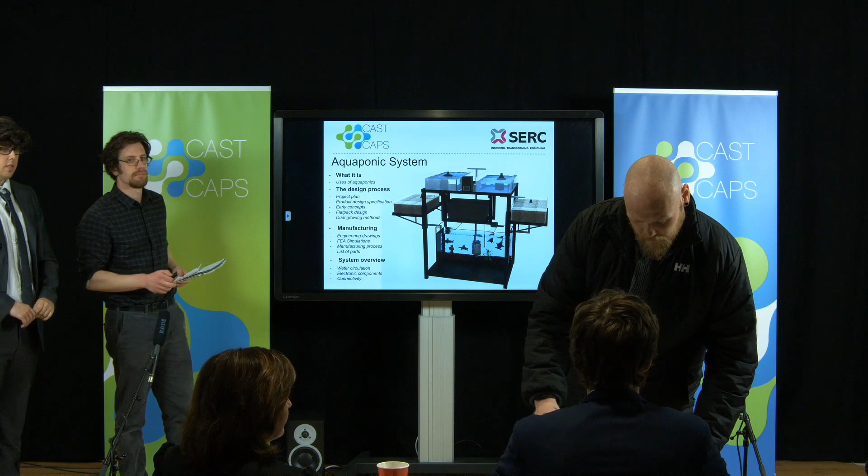So this is our aquaponic system. Within the presentation we'll be going through the different aspects of our aquaponic system - the design process, how we planned it out, the specification we made, and the various other parts of the system, including the manufacturing and the electronic sides. With this type of system there's a lot of different aspects, so the key part of our project was to research everything and make sure we fully understood what was involved.

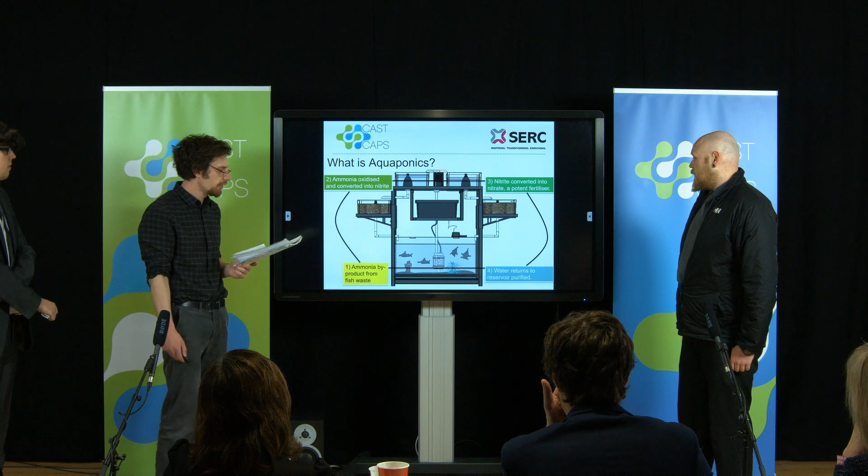First, what is aquaponics? If you're not familiar with it, the simplest way of putting it is that it's where aquaculture meets horticulture - you're using fish life as a basis instead of soil for growing plants. The first stage involves fish waste, and a byproduct of fish waste is ammonia. The water, including the waste product, is fed up through this central pipe, and when it comes into contact with the root of the plant, it's oxidized and converted into nitrite, which is basically a basis for nitrate, which fertilizes the plants. When it's absorbed by the root, any toxic element from the fish waste is cleared, and it's recirculated into the system as purified water, and the cycle continues.

So where can aquaponics be used? Basically, we want to introduce a system into the domesticated market - there's no system like this outside of commercial scale. Our idea is to introduce something into schools for education purposes, to teach kids about engineering and various other aspects of life cycles. The idea is that this incorporates all elements of STEM, so if implemented in an environment like schools, kids could be taught different aspects of this.

There's electronics in this system, and the basis of the electronics is that there's software and programming involved. There's also the learning element of using fish waste to create plants, which is another aspect kids can be taught at an early stage - teaching them about sustainability and how to keep the environment safe. This can be used in a wide variety of areas, like urban areas where there's not a lot of sun, so it can be put in warehouses so crops can be grown healthily and steadily, and families who may not have time to go out and get vegetables can quickly grow fruit and veg that's healthy.

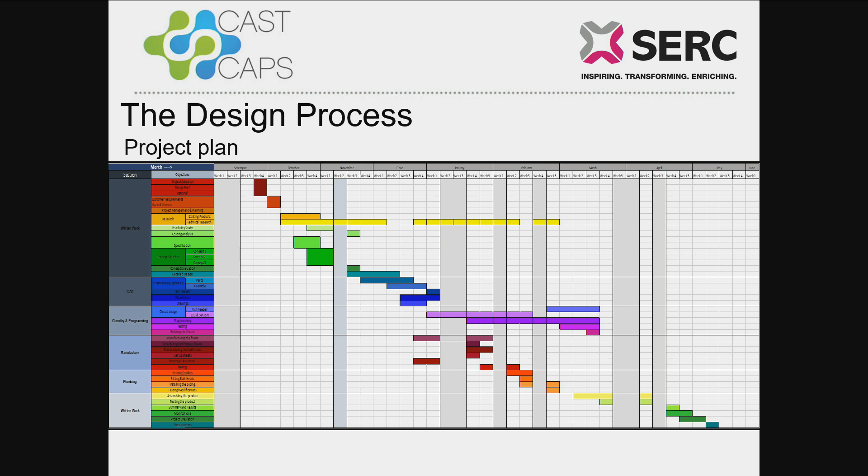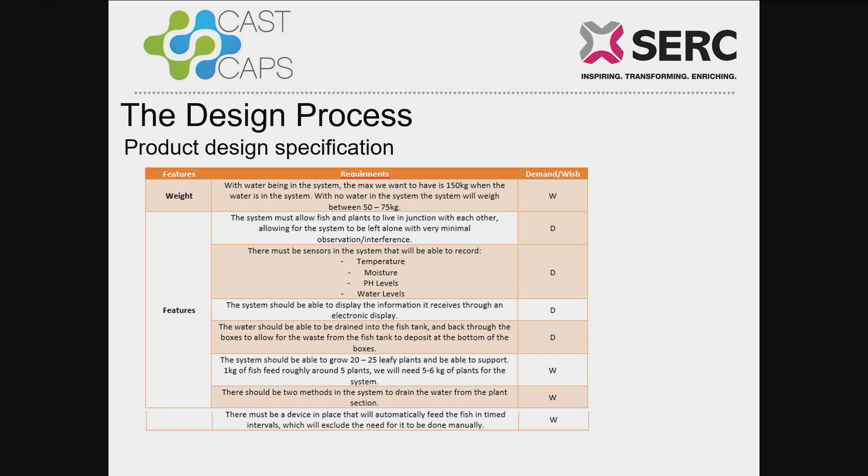This is our PDS, which we used to take the stakeholders' claims in order to design the system. You can see various aspects like the weight. They wanted certain weights and stuff within the actual system itself, and these were known as wishes and demands. So we built our system around that.

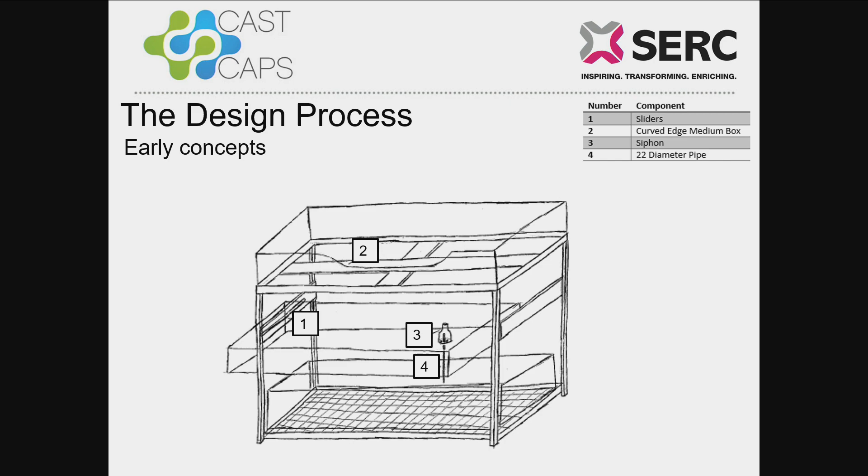So the idea was that this could be implemented in a smaller environment where people could just go in, do their job, put it away, and come back to see that the plants grew healthily. In this concept here, we basically combined the other two and incorporated them into this one system.

But quite early in the design process, something we decided to build our project around was the idea of making it flat pack. The motivation for this was that if it was to be sold in mass produced units, you wouldn't be putting the fully assembled one in stock due to its space intensity. So we actually managed to find a way to condense it down to quite an efficiently sized package.

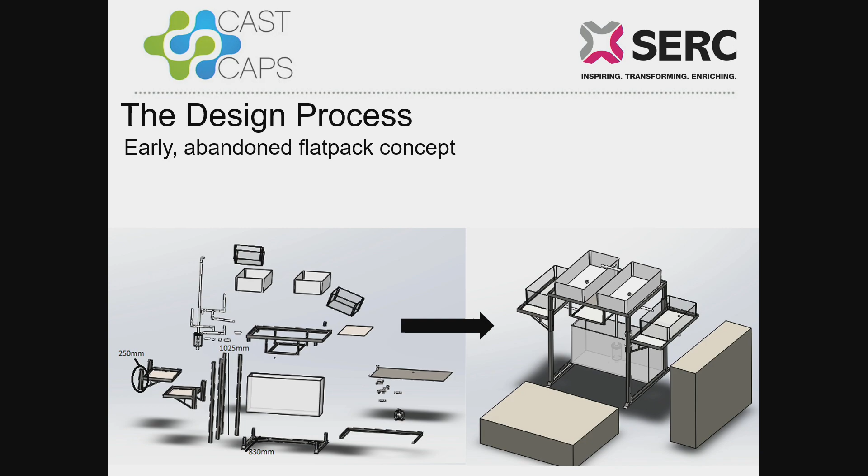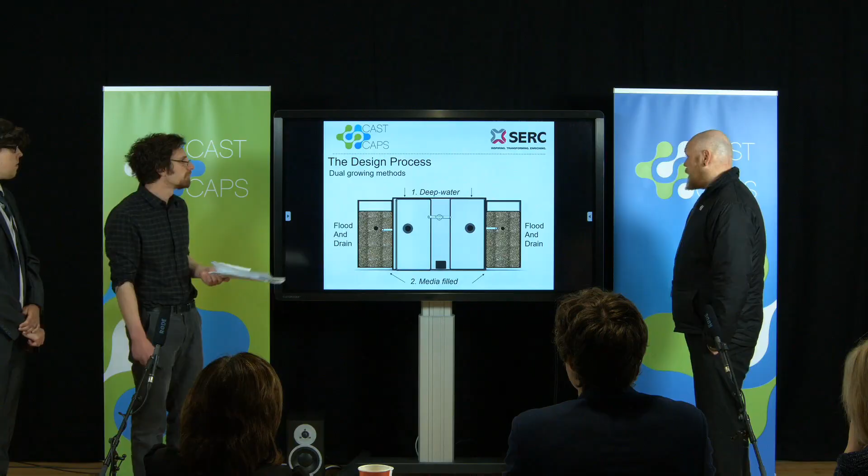Basically, our system works with having two beds at the top here, which will drain off through a wee inlet here, which allows the water being pumped up from the bottom tier into these two beds. Then there'll be siphons in each one of these beds here, which will drain into these side beds, and then that drains back to the main reservoir through solenoids.

With this type of system, there's a lot of water in it, so this means that over time there's a lot of stress from the weight of the water. So to help us design our final design, we used software to simulate the stresses that would be involved with this type of system.

The issue we had was that this software didn't have the required material properties that we wanted. The material we used was mild steel, with a yield strength of around 200 meganewtons. The yield strength for the material we had to use was 350, but the idea was to give us an idea of how the system would work with the water.

From the stress analysis, the biggest point of stress is in the corners at 100 meganewtons. With a 200 meganewtons yield strength, this is quite good because the factor of safety will be around 2. For a system that's quite static and wouldn't be moving around a lot, especially for a prototype, this is quite good, so not a lot of stress will be implemented on it.

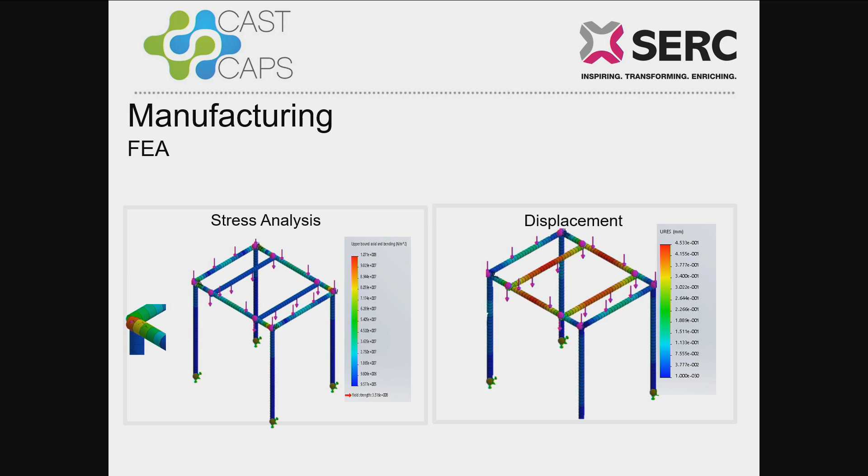Let's speak about some of the manufacturing process too. The system was basically made from box section and angle iron, and the reason I went for that was because it was cheap. Obviously it's going to have the element of rusting, but we had the idea of galvanizing it to give it a bit of a protective layer, then painting it. You can see here from the bottom tier how the top tier is going to slide in, giving it that element of assembly. These here are just basically sitting on the outside, and that's what's holding it up in place.

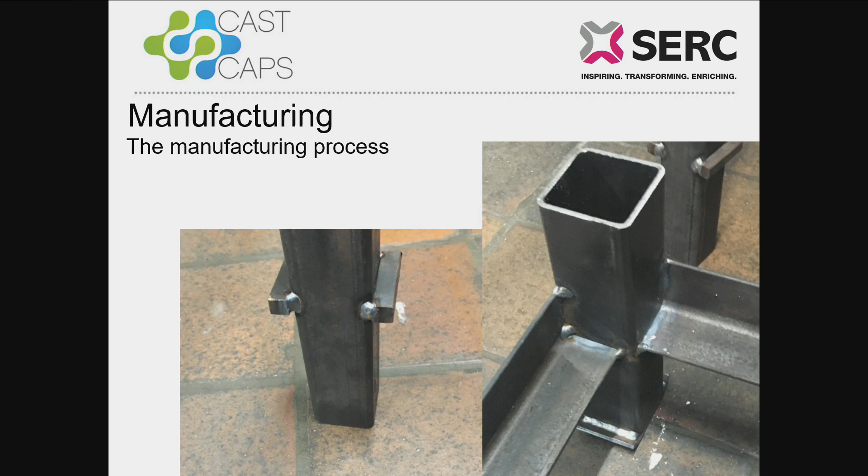To cut the cost, if this were to be mass produced, it could be bought from suppliers, which would cut the cost quite significantly. Other components like the electronics or the plumbing could also be mass bought from suppliers, so all the costs would be brought down significantly. But because it was a one-off project, the costs we had were quite ideal. We were able to source different components from the college itself and different components from outside the college.

This is a wee system overview of water circulation, which shows you the siphons in the top beds and also in the lower beds here. The issue we had was because bell siphons usually need to be 300 mil in depth, but due to the limitation we had with the boxes' depth, we had to think of a new way of creating enough air to get inside. So we made a wider diameter that tapers up towards the top, and the air being compressed works well.

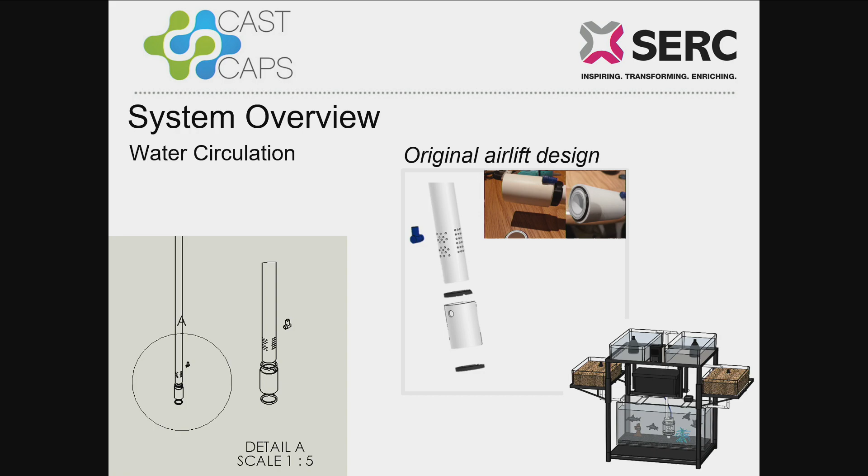The idea being that air is just pumped in, and when it is in a compressed area, it has nowhere to go but up, and that will eject the water with it. This original design was okay in a lot of ways, but the flow rate, the amount of water it was pumping upward every hour, was somewhere in the region of 140 litres an hour, which would not be sufficient for circulating the water through the system enough without the supply stagnating.

So I moved on to a second one, which took on the form of an inverted siphon, also inside a chamber which would put an added element of pressure. As you can see from the bottom here, this is a check valve where the water can come in one way but can't come out the other. So when this fills up, as it would when submerged, it gets to a point where that shuts off, and there's nowhere for the water to go but upwards as it ejects through this siphon here and outward. This yielded much better results of about 240 litres an hour, on top of the 140 of the previous one. That was a big improvement, and it would be adequate for circulating the water in the system enough to keep it fresh and not stagnate.

I have two videos here if it can be clicked at all. Can I click in here? No? Okay, that's okay, alright.

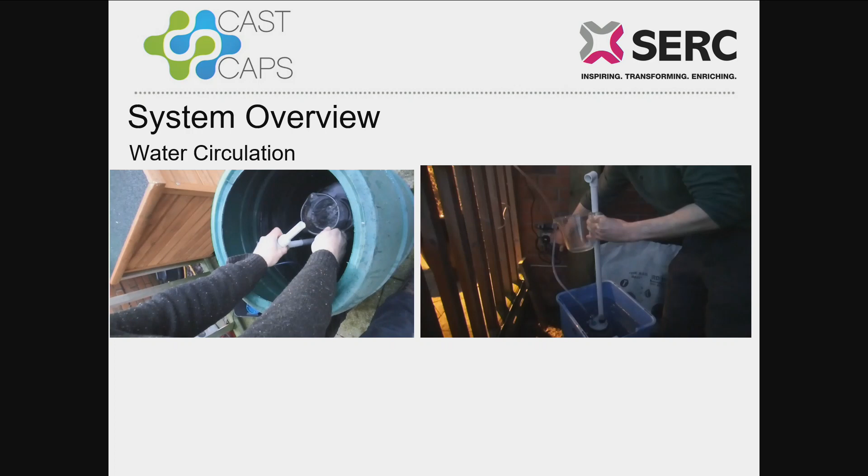So that's the first one there. You can see it's quite stilted in the output. There's nothing really wrong with this in itself, but if you look at how low it is in the water for it to get enough necessary submergence for enough pressure to get the water out, there's absolutely no way that would have gone high enough to supply the top beds.

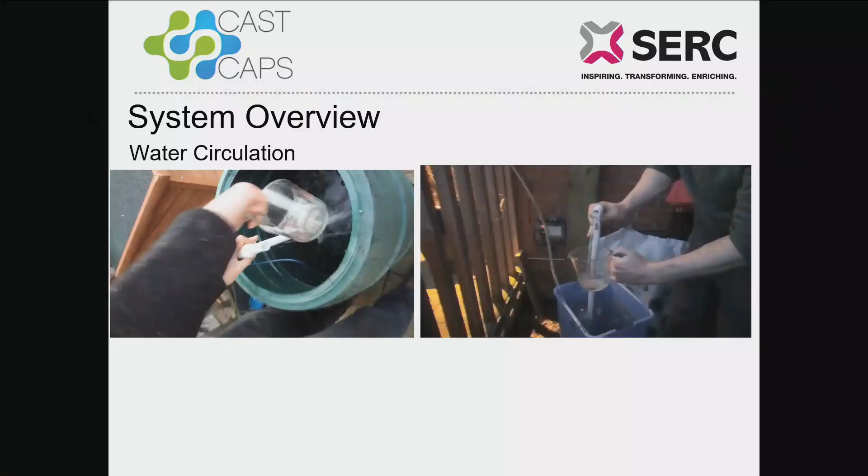And this is the improved version on the right hand side here, which was submerged in a much shallower base, and it still produced quite a significant amount more, and also with consistent flow as well, which would be a bit less obnoxious on the ear.

So the idea of this system was that over time different elements could be observed, and with that idea we decided to implement various sensors, which we'll talk about later in the slide. But for the information to be recorded, we needed a certain area specified in our design that would display this.

So what we done was we created a control panel where we could use various LED screens where the information could be displayed. The idea we had was that we could use a touchscreen LED where you could type in information. Especially with the fish, depending on what fish you have, they eat up different amounts of food. Over time you could observe this behavior and control the amount of food going into the system, so that the waste produced will help make sure the efficiency of the plants is to the max. So the idea was that the whole system could be observed and information recorded in this touchscreen, and that you could go back in time and find out the point of max efficiency with this particular system.

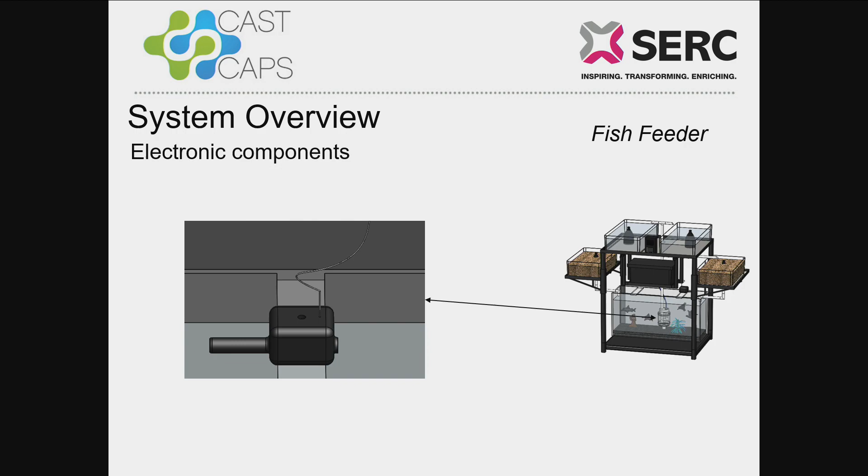So this is also the wee fish feeder here, which is located just above the fish tank here, which is obviously just feeding the fish.

Among the sensors that this system uses are a moisture sensor, which, as you can see, would be sitting in the smaller bed containing the grow media, likely clay pellets or something such, and also a pH meter and temperature and humidity meter. The thing about these is that they don't necessarily automate the process itself, but when connected, can serve as a good early warning system for some sort of malfunction. For instance, if this was generating a low reading, it would most likely indicate that water is not being pumped up and circulated into the system. So it sort of indirectly serves as an alarm system for the pump.

And likewise, the pH will indicate the pH within the water, because you want to keep it quite neutral. If you don't keep it neutral, and it was too acidic or whatever, it could kill the plant and have an ongoing effect within the system. For fish generally, the likes of tilapia, which would be very common in aquaponic systems, they thrive in a pH of around 6.5 to 8.5, which is in the neutral to slightly alkaline range.

Anything above, when you're starting to get into the region of around 10, that would really suggest a build-up of ammonia in the water. That just serves as a suggestion that something's not quite circulating, or the plants aren't quite filtering at the rate you'd expect them to be.

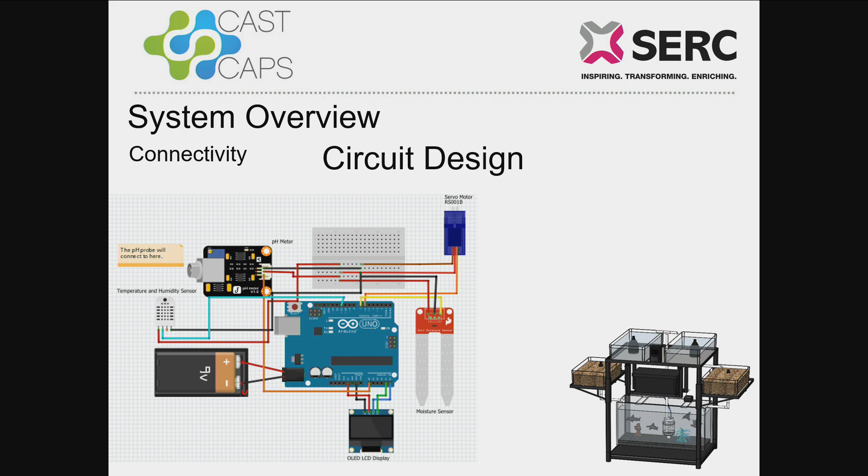So this is just a brief overview of the circuit design. It's a small circuit. The idea is that the electronic box, pointed out in the drawings, will hold all the electronics, keeping them safe from the water. The Arduino here is essentially the brain of the electronics. This is where the program is written, and information is read from the sensors to the Arduino, which then writes it to the LED screens.

Another concept we had was using a Bluetooth device, so you could pair your phone up to the system and read a live feed from the sensors. The problem with this, especially with the LED screen we used, is there aren't a lot of resources for it, and with the number of different components in the system, a lot of time would need to be dedicated to this. But through testing and eventual improvement of the program, we could implement it.

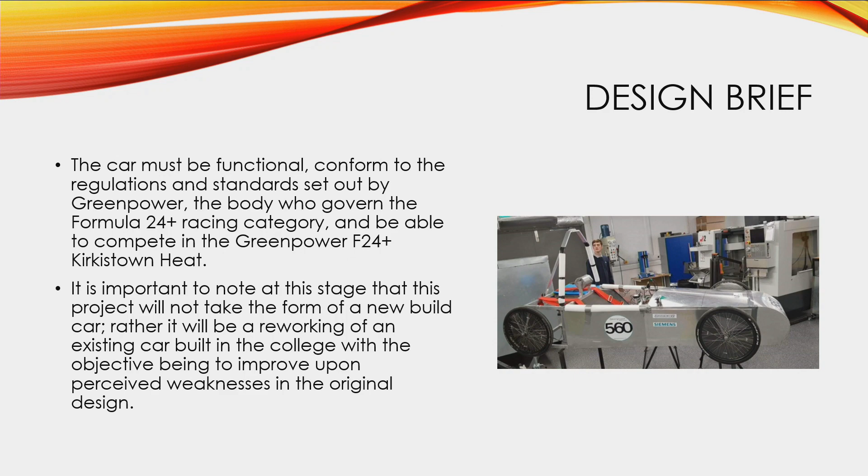So because this is going to be entered in the Greenpower Racing Series, it has to conform to the technical regulations and standards set out by Greenpower. It's important to note here that this car is not a new build - as I've mentioned, it is a rework of the existing car.

So with this being a group project, we had to indulge in a bit of project role delegation. We split the project up between ourselves into two main elements. I would be focusing on the steering - strengthening the steering setup, as well as employing proper Ackerman steering geometry to ensure a good turning motion and proper handling of the car - whilst Simon would be looking at the drivetrain and at moving away from the belt system which we'd employed last year.

The belt system, while it worked, required the belt to be very tight to stay on its sprockets, which we felt was causing inefficiencies in the drive system. Hence we wanted to look at other potential solutions.

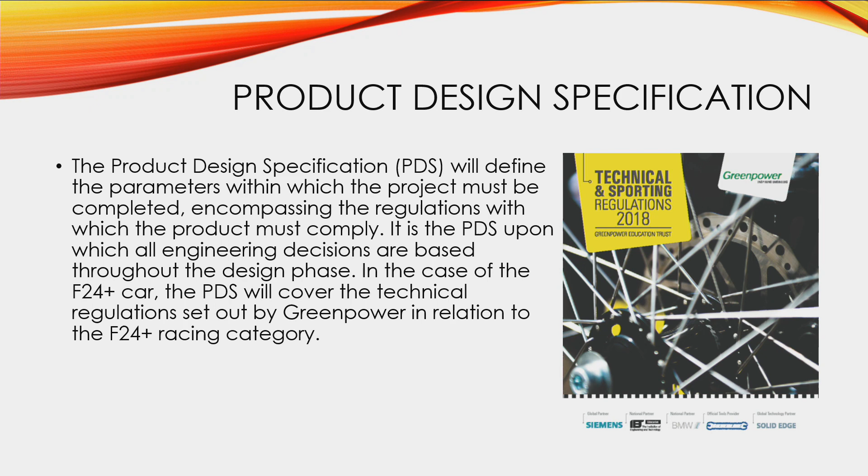An early part of the project is to produce a product design specification, or PDS. In our case this is based broadly on the technical and sporting regulations for the 2018 season as published by Greenpower, and we've got a handout showing our PDS if you care to look at that.

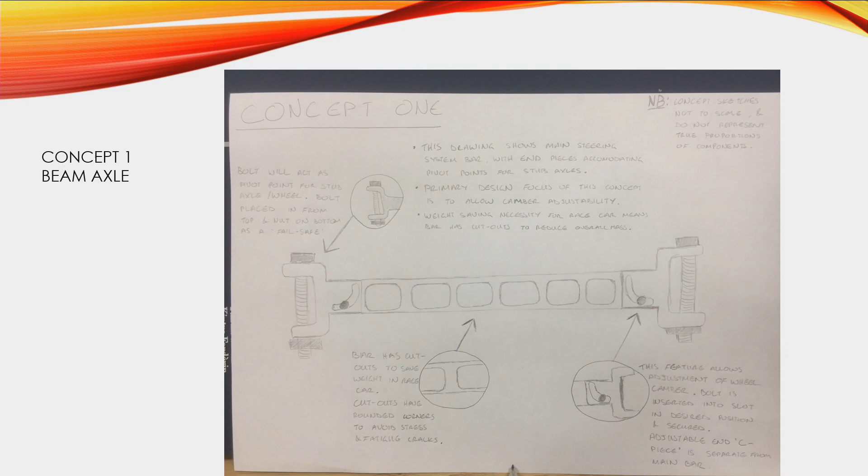This was the first concept, and this employed a beam axle similarly to what was used in the car last year, but the theory behind this was that we would employ adjustable camber angle, which would allow for fine-tuning of the handling of the car. However, we ultimately decided not to proceed with this concept, as the degree of adjustability would be too crude, and I felt it was a potential area of weakness, as we had experienced issues with the strength of the front axle in the previous season.

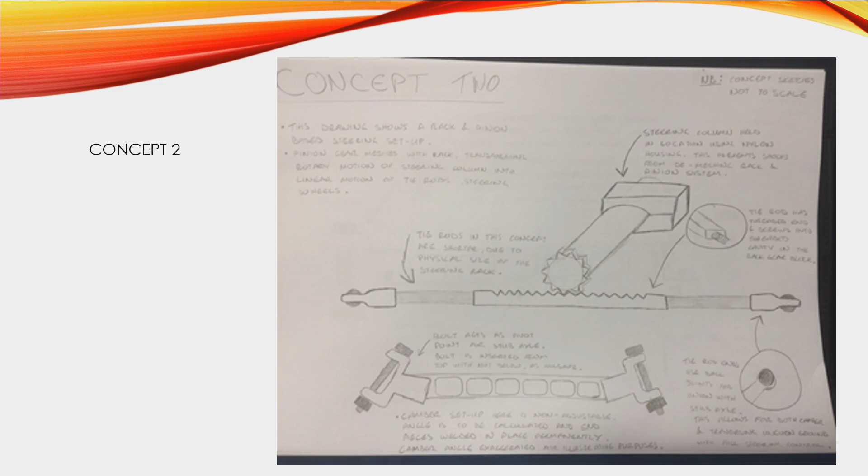This is just a development of concept 1, showing how the track rods would interface with the hubs and the steering arms. In concept 2, we looked at moving from the basic track rods and steering arms setup to something employing a rack and pinion, such as you'd see in a lot of road cars. However, ultimately we decided not to move forward with this one either, on the basis that it was adding really unnecessary levels of complexity for what the car is.

I'll just hand you to Simon now to talk a little bit about his drive system concepts.

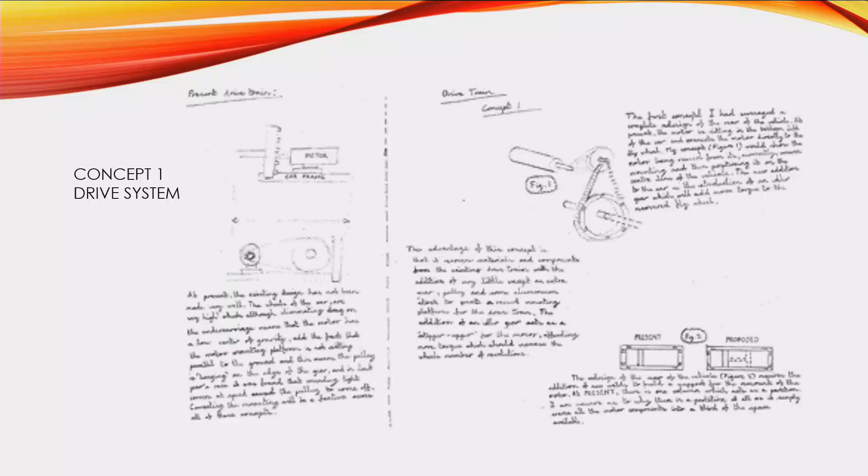Thank you very much. Moving on to the first example of my drivetrain. In the first example, I planned to continue with the pulley belt originally, with the introduction of an idler gear, which would act as a stepper-upper for the motor, so that rather than running from a rather low gear ratio to a very high one, it would go through a middle stage, allowing it to gradually increase and hopefully produce a better result in terms of speed, efficiency and performance.

But when it came to production time, we realised that construction of such would require the motor to be moved closer to the driver's head, which presented some major issues when it came to the health and safety of the driver. Since, as my friend James illustrated, we were working on a refurbishment, we were limited to the space we were working in, so we had to make use of the space, and as such there was no room for an idler gear.

Which brings us on to concept 2. In concept 2, I planned to bring in a differential, which would allow both wheels to run off the same axle and revolve at different speeds.

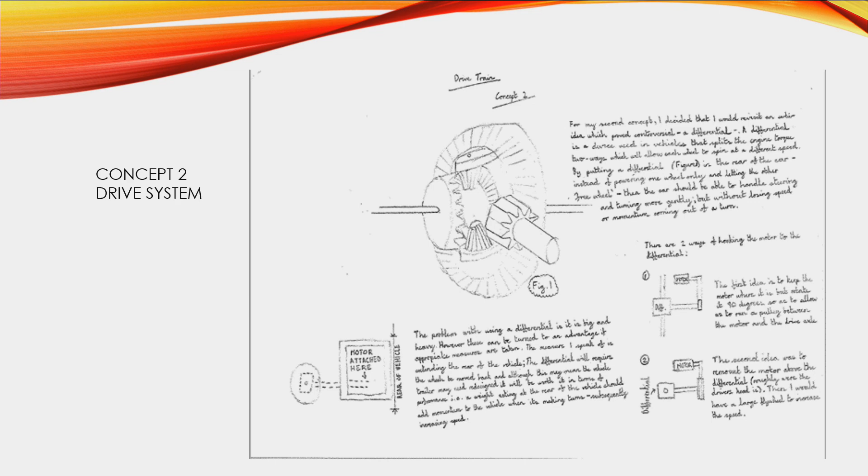This seemed like a good idea initially, but moving further forward with the idea, we realised that a differential is very heavy, as it's only really used in larger scale vehicles and would have to be recovered from such a place. They would also require a lot of time because you'd have to get the gear ratios right for the smaller wheels, since the cart isn't built to the size that most differentials would be. And once again, there were time and space constraints regarding the size, weight and placement of it.

Which brings us to our final concept, where I plan to use a recovered bike derailleur gear shifter. The purpose of this being a lead on from concept 1.

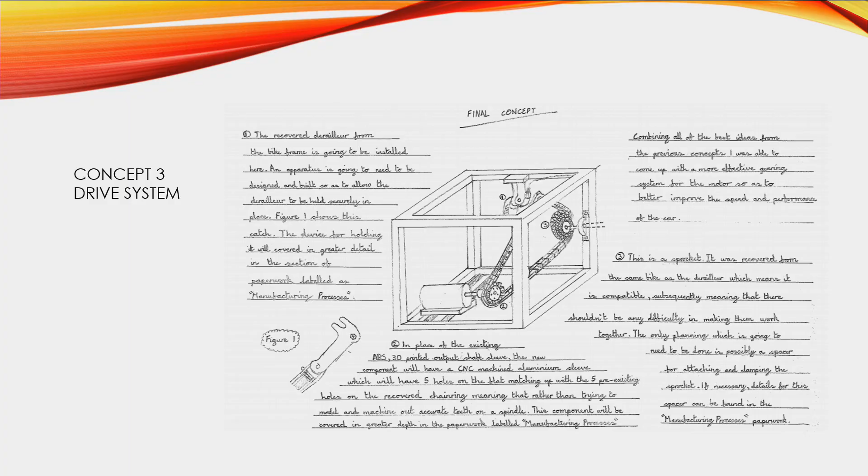In concept 1, I planned to have a stepper upper. Concept 3 took this idea further with various levels of gear change. So we brought in a gear sprocket recovered from an old bike, a recovered derailleur, and our own components, which there are drawings available for you to see. This would allow the driver, using a gear shifter in the main cabin, to adjust his gears as needed to get the speed and torque required on the track on the day. This is our final synthesis, and you'll see we decided on final concept 3.

Now we'll look at some SolidWorks. Once we decided what steering system we were going ahead with, it was time to start drawing things up. These are renderings of the front axle setup as it now exists in the car. You can see the middle section, the beam axle, was actually recovered from the car as it was run last season, because that had been made to overcome a failure in testing, and it functioned flawlessly on the day, so there were no strength issues there. If it ain't broke, don't fix it.

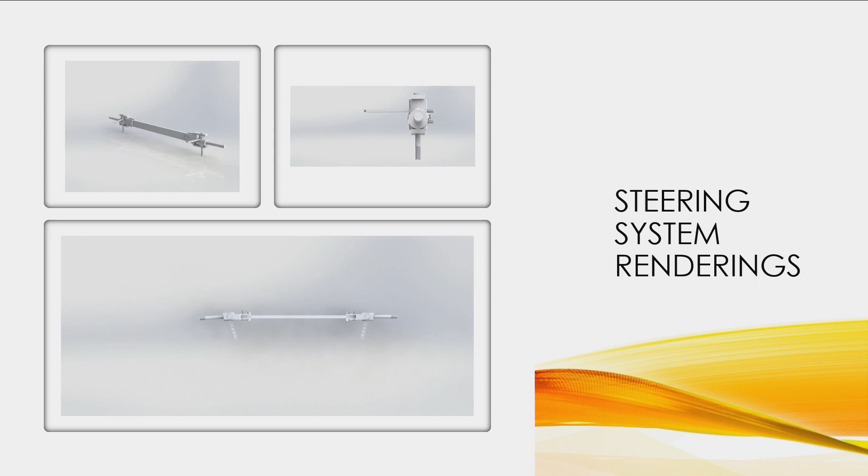The hub carriers last year had been welded on, but I felt that having welds of possibly unknown quality and strength was an area of weakness that could fail. So we decided to move to bolt-on, bolt-off hubs, which also makes the car easier to maintain if there was to be a failure. As you can see from the inclination in the drawings, there's a 3-degree camber angle set up, which allows the steering to self-center properly due to the inclination of the kingpin. Also, when the car's going at speed, you increase the contact patch of the tyre with the road, allowing for more neutral and balanced handling.

Here we've got some stress analysis done in SolidWorks. This is one of the hubs. You can see a 3D printed version that was produced before we committed anything to metal, and the stress analysis shows this is mild steel. We've got a yield strength of 200 newtons per millimetre squared, and from the multipliers on the scale, the worst stress that can occur is about 45, using a load of 50 kilograms.

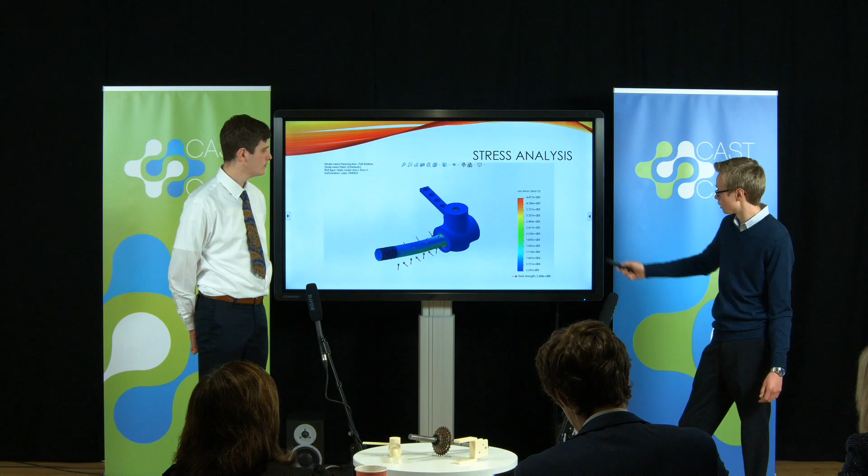We calculated that because the cart weighs about 120 kilograms, and the average male weighs about 80, giving a total weight of 200 kilograms split between the 4 corners. You arrive at your 50 there, which is 500 newtons of load, and you can see from the colours in the graphic and the numbers that you're not going to get anywhere near the load that's going to trouble the materials. While we have some deflection shown on the diagram, that's a worst case scenario, and in reality there's no deflection on the part at all.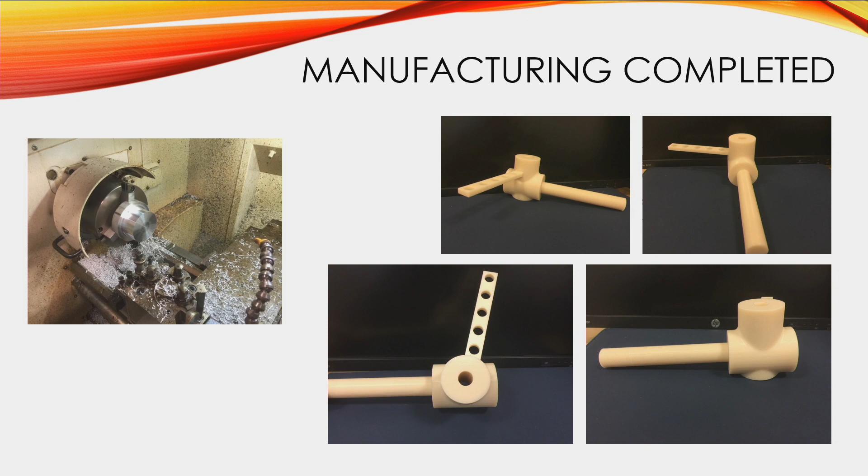As I was saying, we put things through the 3D printer just to see that they would fit in the hub carriers, that the design was okay to go ahead with before we fabricated anything, and that's what's on the table there. Just got a quick video here, I hope this plays okay.

This was the part, just a part of the drivetrain being produced. I thought that would be interesting to have a little video.

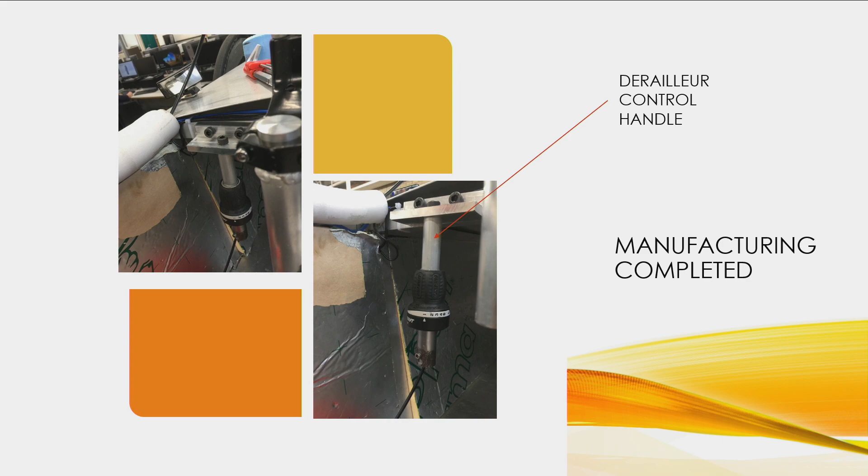Simon will tell you a bit about this slide. As I mentioned earlier, the final concept had the gear shifter in it, using the derailleur. Obviously the derailleur needs to hook up to something in the cabin that the driver can get at, so we recovered the original shifter from the bicycle and mounted it on a simple post, allowing regular turning at his own comfort if needed.

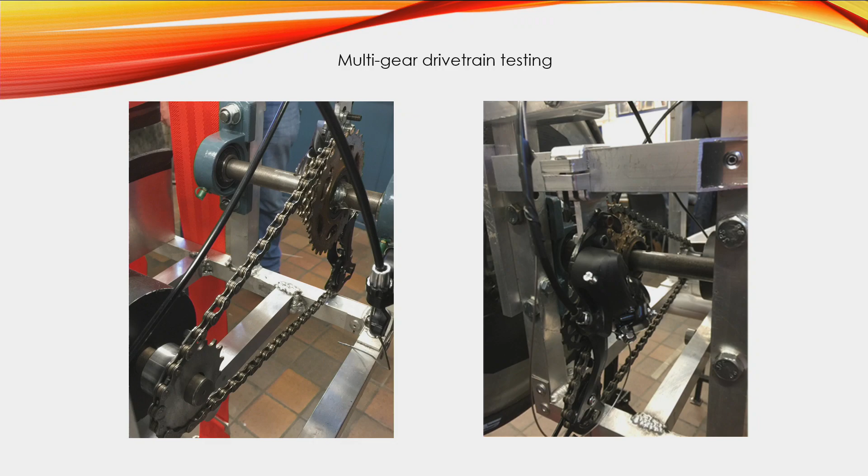And here we've got pictures of concept 3 in reality. This is the shiftable gears. You can see there we have the bicycle derailleur, the cassette gears interfacing with the motor.

This was tested, as you'll see in a video in a moment. The gear shift works, it worked flawlessly. However, the gear ratios were placing undue strain on the motor. So as a result of our testing, we've decided, given the time constraints until the race, we're going to go this year with a single speed setup using a lower gear ratio.

However, if we were to have infinite time to develop the car further, I think we would look at using lower gear ratios but using the derailleur, and then perhaps instead of the cassette from a bicycle's rear axle, we'd use the chainring setup from the crank of a bicycle, or perhaps machine something bespoke in the college to suit our purposes exactly.

This first video, we tried starting the car off. We brought it outside, didn't realise it was in its highest gear, and if you've ever tried to start your car in 5th gear, you're on a hiding to nothing. You'll see from the video that this didn't go well. We had to have a little push.

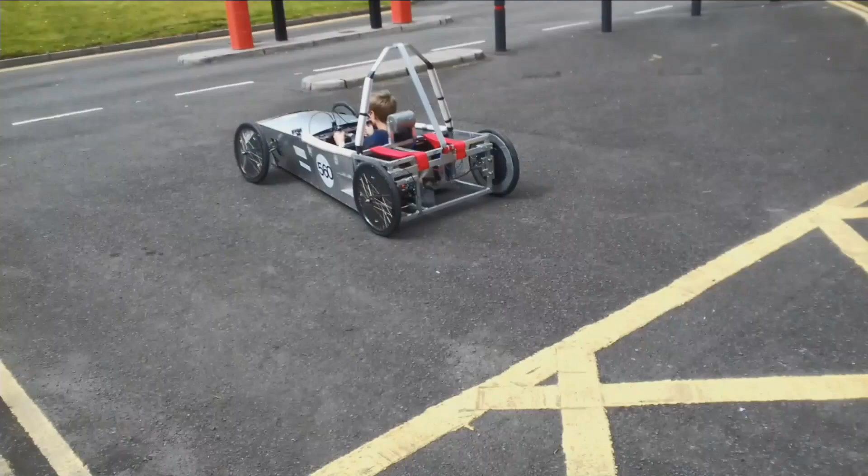So what we did after this was, in the next video - this has gone a bit out of focus - we lifted the car off the ground, ran the motor up, and we were able to change the gear, because if we were on a hill, we weren't going to be able to move it off in 5th gear, so we had to bring it down to 1st gear to continue testing.

That's it successfully shifting. We'll cut that off before it just goes to Simon's feet. And this is yours truly testing the car in the car park, and it ran quite well.

But I would like to have some... you'll be able to see there the camber angle on the front wheels. That's what I was talking about, just about improving the handling of the car. I think that's, we need to see that.

Okay, so Simon, do you want to talk through this? Certainly. So, having seen what you have seen in the testing process, we can now come to our evaluation in the final. So the pros was, the gear shifter did work, despite some reservations from certain people that it wouldn't.

The unfortunateness of it was that we used the wrong sprocket. We should have used the front sprocket from the crank handle rather than the one on the rear wheel, because the tooth ratio was very similar to 1:1. Ideally, you want something more in the range of 1:2, 1:3.

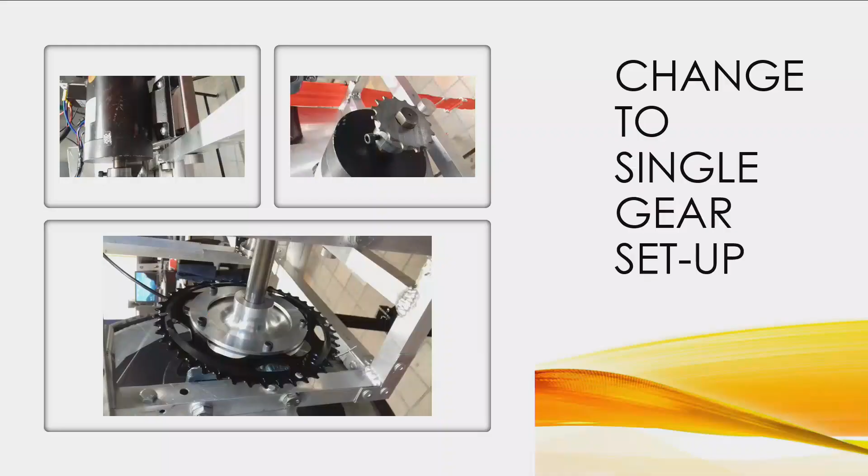Yeah, as I was saying, with the time constraints, while we would love to ideally go towards maybe 2 or 3 shiftable speeds using lower gear ratios to improve the torque of the car, time constraints in that the race is on Saturday have caused us to come to this sort of compromise, and we've got a chainring there that gives a gear ratio of 1:3, and that's actually going to be tested this afternoon.

That's on the car now and in place. We just need to set the chain on it and test her, but we've no real fears that's going to be any problem, because that's not too far removed from what was run in the previous year and what a lot of the other teams in the Green Power competition are running.

And while it's not what we had wanted to do with the project and the shiftable gears, I think we have to take a pragmatic approach. We have to get the car out, and we can build upon that in future. Thank you very much for listening to all that, and if you have any questions, please fire away.

Thank you very much. Very, very clear, well set out presentation from beginning to end. One of my questions was, when is the race? You've answered that. What I liked, I suppose, is more of a comment than anything else, is that you identified the problem, and even as you moved forward, you very clearly set out all your different concepts and why you went with what you went with, and then in terms of time, you've had to revert to something else, and I think that's very honest, and as you said, it's very pragmatic. So I just want to say well done. I have no other questions on it.

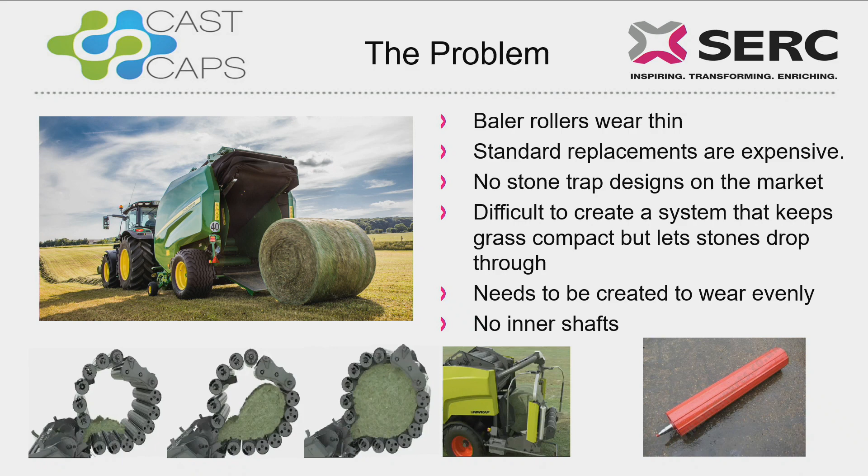With old genuine rollers, the problem is that they have no inner shafts. This shaft does not go the whole way through, it only goes in part way, and it's braced inside. So when a stone hits one of these braces, it kinks, and basically there's no shaft to support it. It needs to be created to wear evenly, so the grass doesn't wear down on one area, it wears the whole roller evenly.

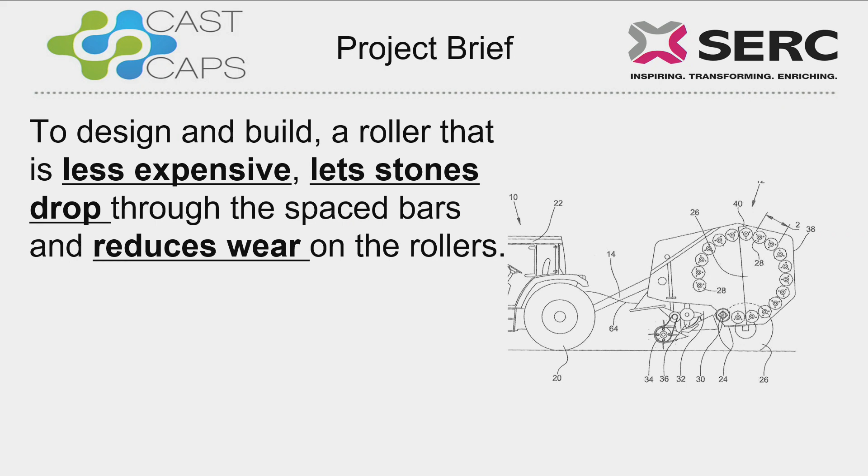My project brief was to create a roller that's less expensive, as genuine rollers are about £700 to £1,100. Letting stones drop through would be an advantage if I could do this, to do away with the problem completely, eliminate the stone, and reduce wear along the roller.

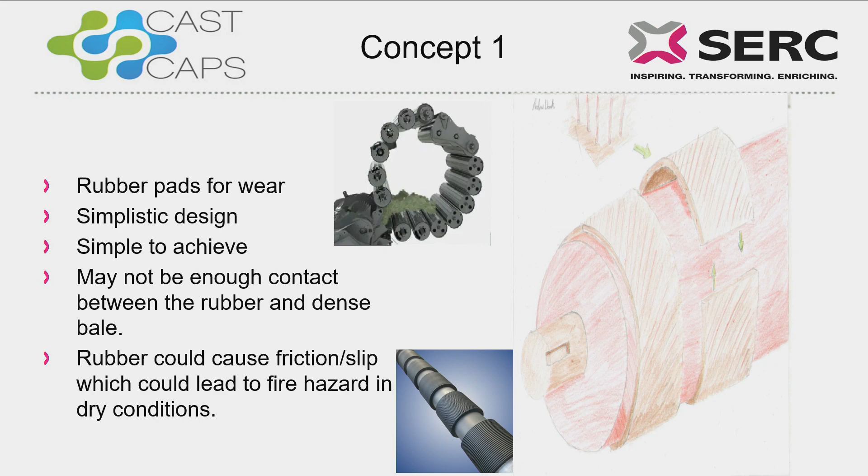Here's my first concept. My first concept was to create rubber pads around a round drum. This is a simple idea, easy to change. Though there might not be enough contact between the rubber and the grass, as it's very tight near the end. As this is compressed to make a really tight bale, it might start to slip. And rubber and grass in very dry conditions, which isn't very often here, could potentially cause fire.

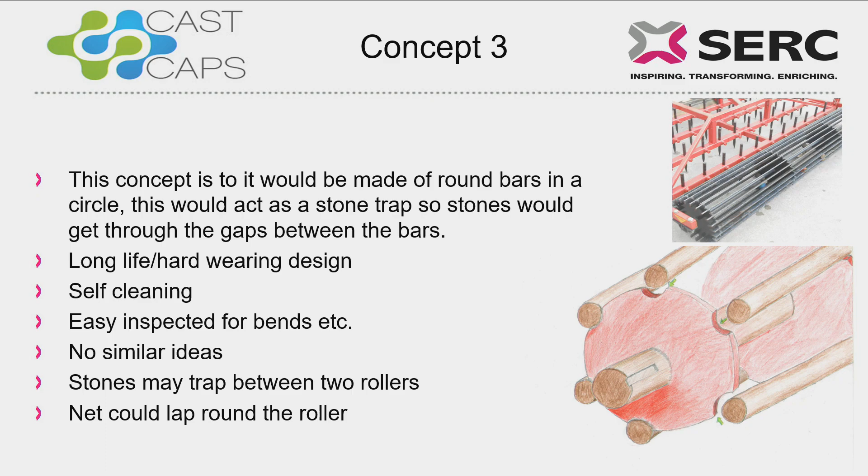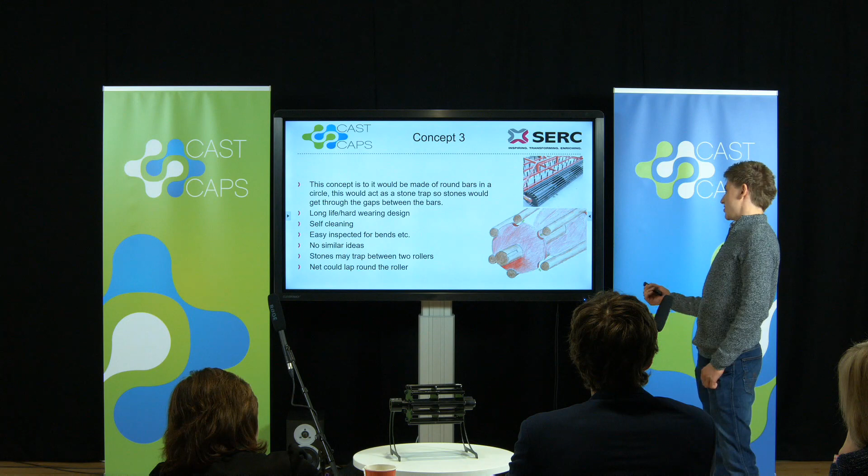My third concept was to make a roller with bars in it, with gaps in between, so that stones could actually drop through, eliminating stone. Self-cleaning, there'd be no debris getting onto the rollers, so it stays clean. Easy to inspect for bends, as you can see right round the whole roller by looking down through it, whereas a roller with a centre you have to turn to look right round it. No similar ideas, although stones or debris may get trapped between the bars, and if two rollers are rotating beside each other it may cause problems. The only thing is there's more chance of netting wrapping around the inside of these bars, which I didn't want. So for my concept selection, I decided to go with this one, concept 3.

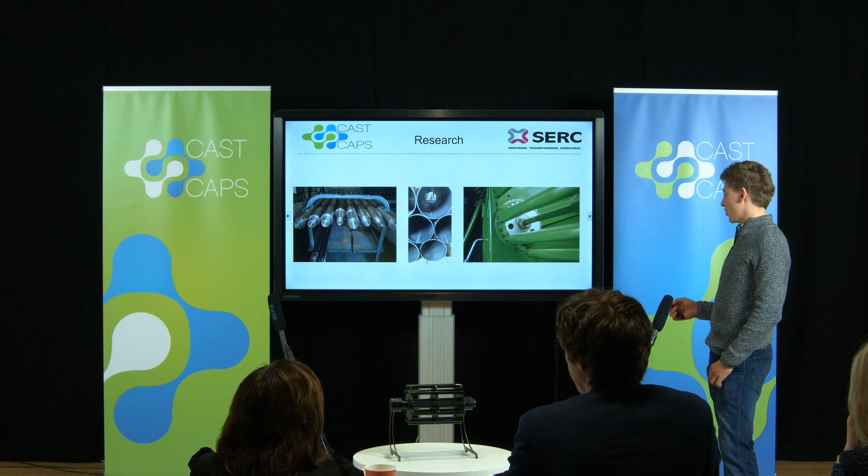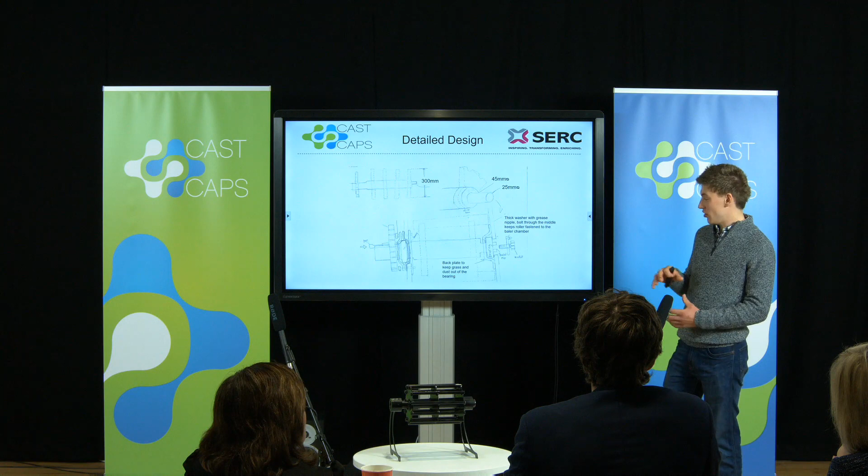For the detailed design, it's maybe quite hard to see, but the roller has to be 12 inches, with 45mm shafts and 25mm shafts. I had a bit of bother here, where since my design isn't a solid roller, the grass could get down through these rollers and into the bearing, so I had to try and keep grass out of the bearing, as grass and bearings don't go too well together.

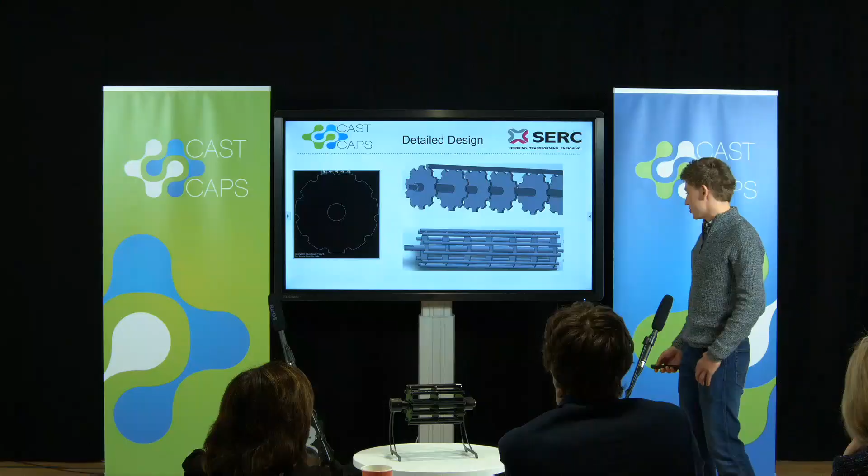Here's some SolidWorks design. This is SolidWorks, as you can see, my whole roller made on SolidWorks. Manufacture here is the manufacturing of the roller.

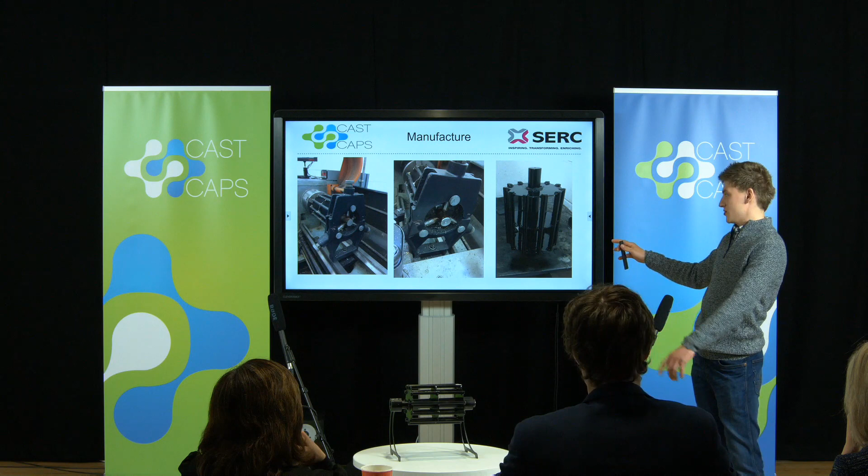Here's the shaft being cut and the bushings also being made and the shafts being turned out. Here I had a bit of a problem as I forgot to lathe the face of the ends of the shaft, so I welded it in and then couldn't lathe it out, so I had to overcome this by using the centering device to level out the shaft so it wouldn't go off balance while using the lathe.

This was overcome easily. Here's a bit of testing. As for doing this, I was able to put the roller in the lathe and try it out. So here...

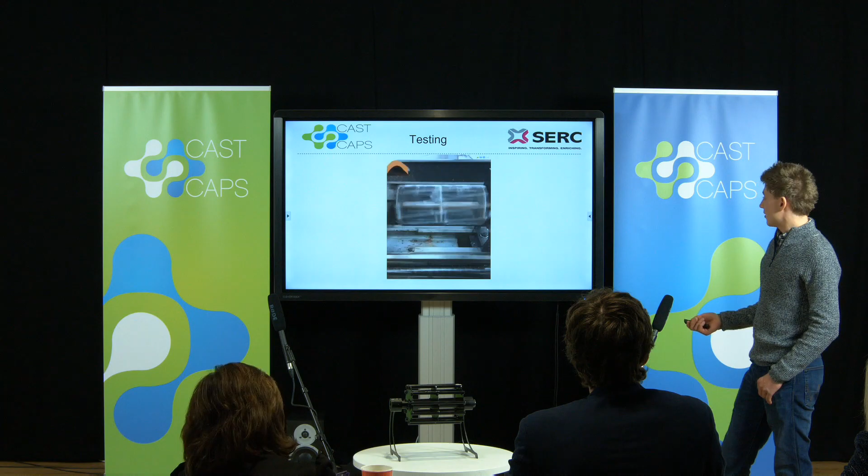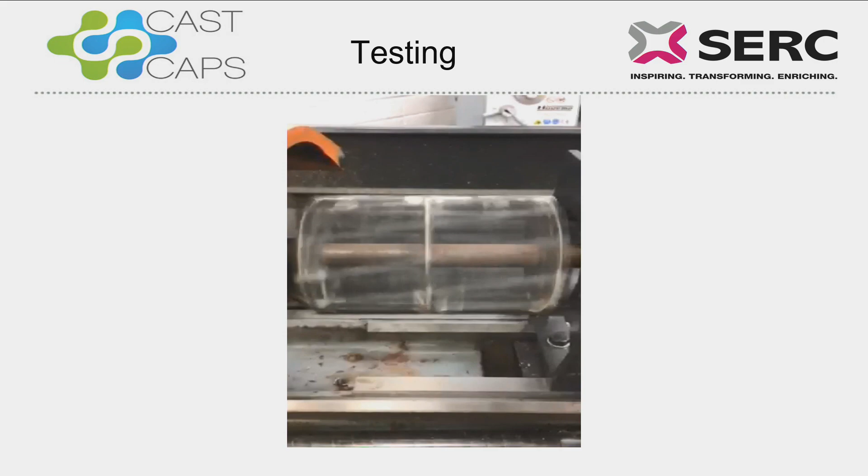Is the testing of it, and this here enabled me to run the roller at 700 RPM, which normally the baler roller runs at 300 to 400, so this has enabled me to test it and well over test it.

As this roller, well, the paint will only stay on this for maybe a few bales, as these balers are doing maybe 10,000 bales a year. So the shutdown cycle could be, maybe when you're turning the machine off, spray the whole thing with oil and then hook it off and wash it, or wash it then. That's the end of my project.

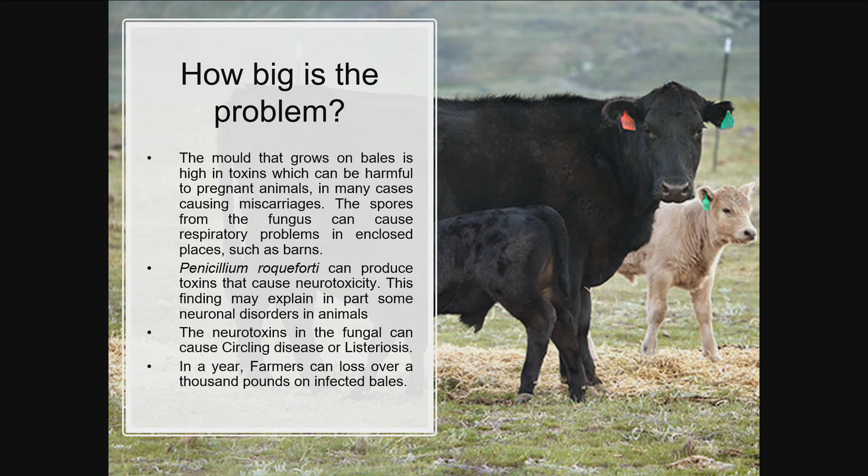So whenever animals eat it, it has an extremely damaging effect to their insides. It can cause spores to get into their lungs and cause breathing problems. It can also be transmitted to animals through neurotoxins that are produced, and these neurotoxins can cause circling disease, which is a problem with the animal's mind or brain, causing it to tilt its head to the side and fall over.

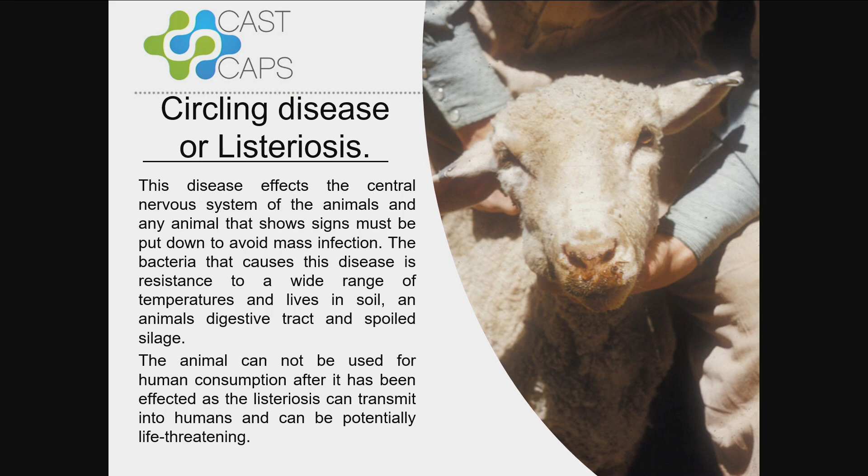And if the animal actually gets the disease, it has to be put down to stop mass infection. So that's a huge loss to the farmer's income whenever they have to get rid of an animal, and it can be transferred into humans through their products.

Eating the meat of a cow or sheep that's gotten this can cause problems with humans, especially with mothers that have to breastfeed their children. So it can cause lots of problems with that.

Some of the research we did was on the fungus that grows. We tried using different herbs on the different types of fungus, and we found that oregano was the best herb to use because of its different properties. It has many antitoxin properties, and many antifungal, antiviral and antibacterial producing or preventing properties. So it was the best use for what we were planning to do.

I come from a farming background, and we bale maybe 50 bales a year because we have quite a small farm. So having to lose half of it due to fungus growing is a huge hit to our income, and it's usually just towards our own animals.

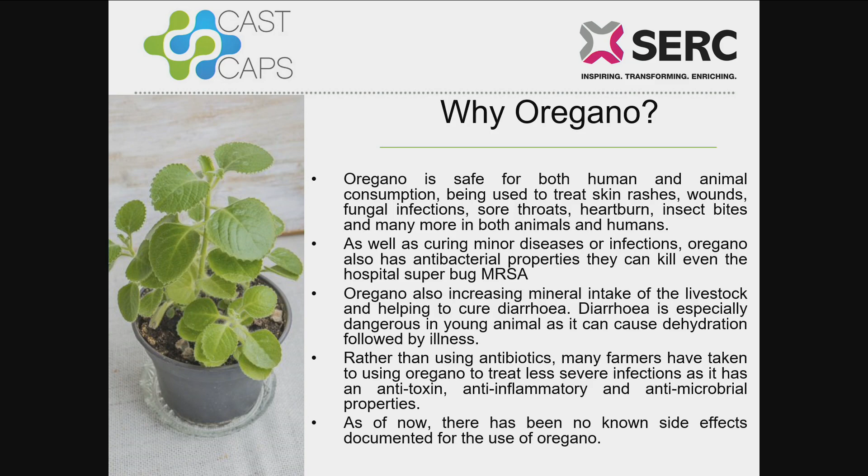Oregano - I went through a lot of research to make sure that oregano was safe for humans and animal consumption. It's been used in skin products such as creams to get rid of rashes. It's used for burns, fungal infections, sore throats, bug bites, and as of yet there's been no record of side effects documented from the use of oregano.

It's also been used to help with MRSA, the huge superbug that's going around in hospitals at the moment. So there's been a lot of research into the prevention of that, as well as how it could stop the fungus and these other problems.

It also has a lot of benefits. It can increase the mineral intake for animals. It can cure diarrhea, which was also a huge problem with younger animals, because whenever they have diarrhea they lose a lot of water, which can lead to sickness.

We did a small experiment using silage from my farm. There was quite a bit of it infected, so we took some of it and took some of the fungus off the silage and plated it on malt agar, and took some uninfected pieces of silage, cut it up and placed it onto the petri dishes with it.

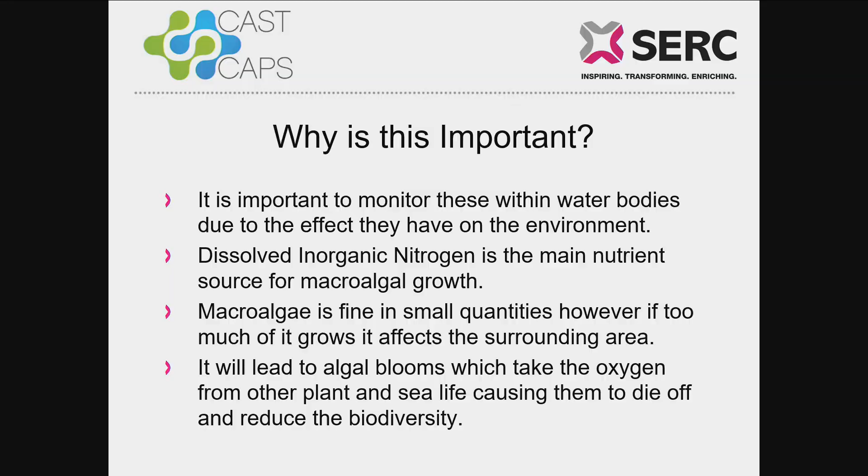It's important because too many nutrients cause an excess growth of algae and macroalgae. Too much algae will take up a lot of the oxygen in the water, leading to the death of native species and the introduction of species that can cope with those conditions. Fish like cod would swim away and die off, whereas less desirable species like shrimp start to take over. Over time the water turns green, and eventually cyanobacteria can appear, which can be toxic to both humans and fish.

The methods for collection: dissolved inorganic nitrogen is easily collected by the NIEA. They've got probes set up around the harbour and the inner and outer lough, so they can just go and get the information.

The macroalgae collection is a bit trickier. It's a lengthy process, and the macroalgae growing season is in the summer months, roughly June to August. You have to be on the shoreline by around 6 in the morning, and a shore survey can take anywhere between 4 and 6 hours with a team of 10 people.

They collect the macroalgae species count using a reduced species list supplied by the Water Framework Directive (WFD) for Northern Ireland, sweeping the shore as the tide comes in, picking up seaweed and ticking off how much they've counted along the shore. Then there are calculations to determine if that represents good growth or if there's bad algae present.

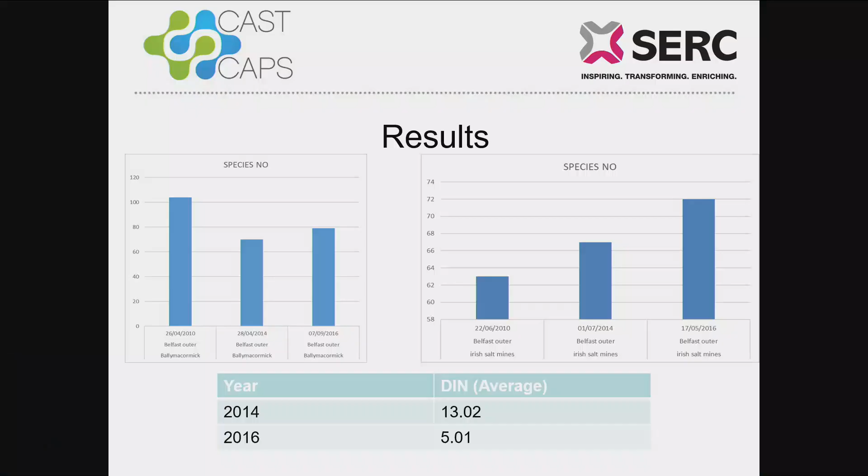For the outer lough, at Ballymacormick, the first result was in 2010, with up to a hundred unique species growing that year, which slowly declined but remained relatively high. The Irish salt mines site has been on an increase too; in 2016 the DIN was 5 micromoles, which is really low, but there was also a lot of species growing. So I'm concluding that species in the winter are taking up more of the dissolved inorganic nitrogen.

This can be prevented in various ways. A lot of the stuff coming into the waters would be from farmers, and they're using too much phosphorus in their fertilizers. So if a regulation was in place for fertilizers to be reduced, it could possibly reduce the amount of nutrients being washed into the water, potentially cutting down on the DIN.

Now for macroalgae, it's a wee bit trickier, because you can't really go in and just take it away and be done with it. There's two methods I found that people have been using around the world. One is the use of algicides, which kill off the macroalgae and algae, but the potential problem is it's putting more nutrients into the water bodies. So some of the nutrients they could be using could be killing fish there. It's kind of getting rid of one problem and bringing in another problem.

Now there was a Dutch company, and they've set up this ultrasonic buoyancy aid device. They put it in the water, set it to a frequency, and it just disrupts the growth rate of the algae, but it doesn't affect the fish. So that's kind of like a best case scenario that's coming forward within science.

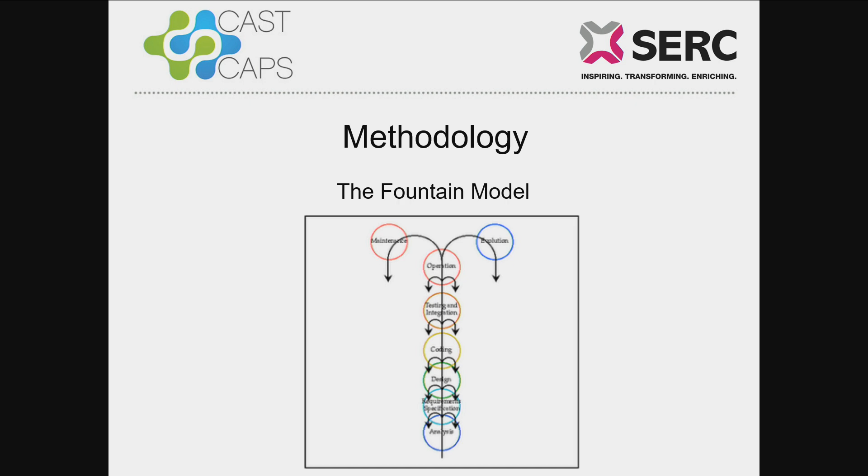So what methodology am I going to be following? It's called the fountain model. It follows the traditional waterfall model, except you can go back to any stage you want. So if there needs to be a change within the analysis, the requirements, the design, the coding, the testing or integration, you can float back to them, because I find that more realistic, and it offers the potential for it to be maintained and added on to when evolutionized.

So what are the deliverables? Well, there'll be a project specification in relation to this. I'll be using a program called Unity 2017. It's an engine that allows you to program in 3D environments. It's very, very good. And with that, you get assets.

Now, an asset is something that can be added to Unity. So it could be 3D objects, or a program that can be used in Unity, things to help you build what you're doing. So ProBuilder is one, and that basically allows you to create and manipulate objects, and it's very, very good. And with that, ProGrids works with ProBuilder and allows you to build more accurately to scale.

And then Blender too as well. That's an open source software that allows you to 3D manipulate objects. It's also very good, and this comes to FBX models - that's a file type of a 3D object, and that's the file type that Unity uses. So if you were able to find a royalty-free model online that's in a different file type, it could easily be converted and brought onto Unity as an FBX model. And if it's royalty-free too, that's a win-win, because you can edit that and use it for your program.

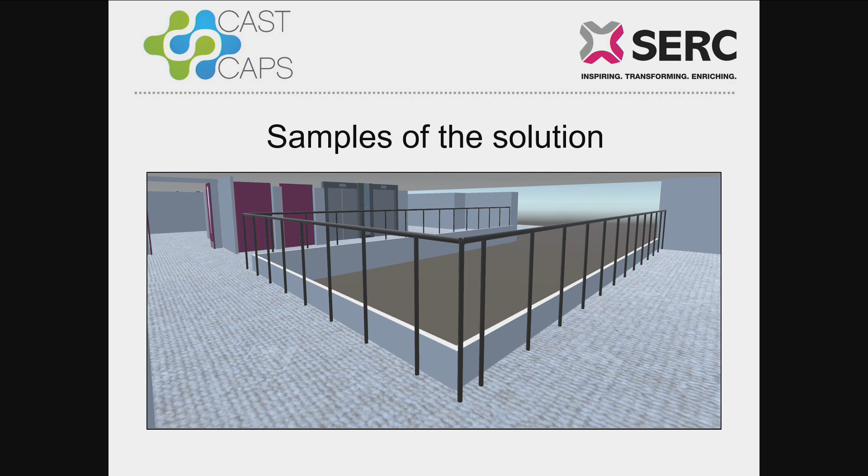Basically, what you can do is extend the item downwards, so that'll be big for the void that's there down to the reception. They're just double doors that would lead into what I believe is the library on the other side. And then that's just the hallway of the 4th floor.

So when you're looking down there, I think this one is a hygiene room, disabled toilet. In here would be where the fitness suite is, and double doors. And then that's another door that would lead on into the fitness suite as well.

Now, obviously from the picture, the fitness suite, I didn't really know what the colour schemes and things like that would be. So take these designs with a pinch of salt, but this room is to scale of the fitness suite.

I actually went down here yesterday, being able to know where to go when I'd never been there before. I'm doing these off 2D plans, which I'll show you in the next image of how I've been drawing this up and extruding it.

So that is to scale, so it's very easily changed. I can change that floor in about 5 minutes whenever I get the chance to, of a wooden floor, which is what it's meant to be. And then that's just the double doors leading to one of the back stairways, which I'll be building as well, just in case they want the option of which stairs to take.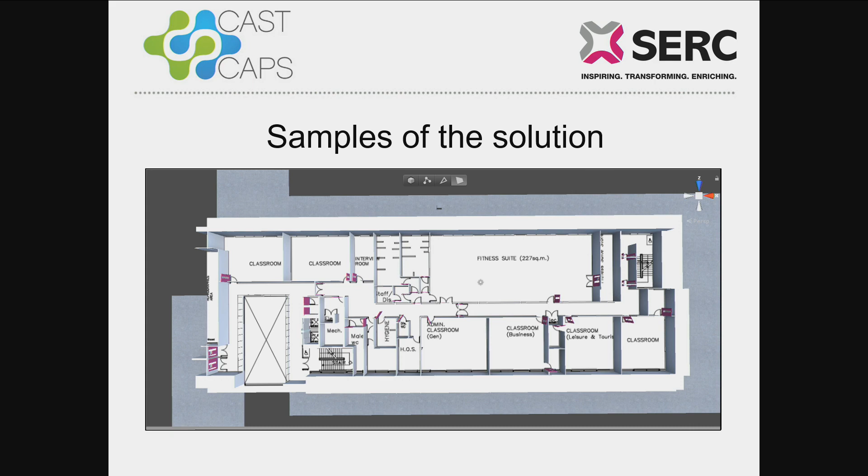It does take time, but I've been working very hard on this for about 6 days now, and I think I've completed quite a lot in that time. It's great potential - it's something that's probably never been done before with firefighters. They've probably never thought of using virtual reality to train firefighters. So thanks for listening. Do you have any questions?

Well done, Adam. A very interesting project, and well presented in terms of showing the floor plans and how you're building that up. I know you seem to have a way to go yet to get it completed.

I'm just wondering, is this your first time working with, as it were, a real life client? And how have you found that process? I know you've already outlined some of the discussion, they've changed their minds and so on, but have you found that beneficial, and what are the main challenges?

Okay, so to address your first point, it's not the first client I've ever worked for. From when I was 14 years old, I was a QA tester for a games company. I've also worked with a software election company called Modern Democracy, and I worked on a project with them for about 6 months.

So it's not in fact the first client I've worked for, but I love getting to meet different clients, because you see different interests with IT, and you have to take on board another person's interest. So whether it's developing an app or a 3D simulation, I like getting to know different clients and their needs, because it just makes it interesting.

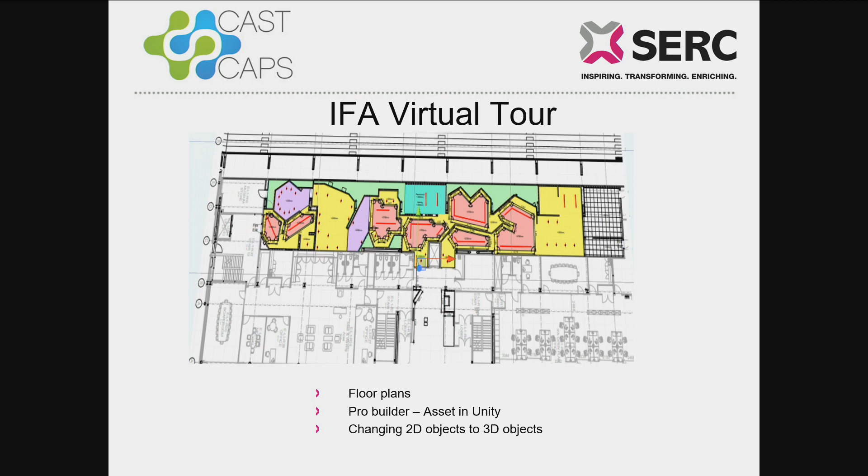To start communication, Hard Bags got us in contact with the IFA, and my details were forwarded to Stephen Garrett. Myself, Charles and three other members of the group went down and met with him for a rough tour to get an idea of the size of the virtual tour, and I asked him to send floor plans so we could get on with the build.

To do the floor plans we're using ProBuilder, taking a 2D image and turning it into 3D by raising the walls, making it into a virtual reality tour.

This was the start of it, on day one, just getting a feel for Unity and beginning to build the shape of the floor plans.

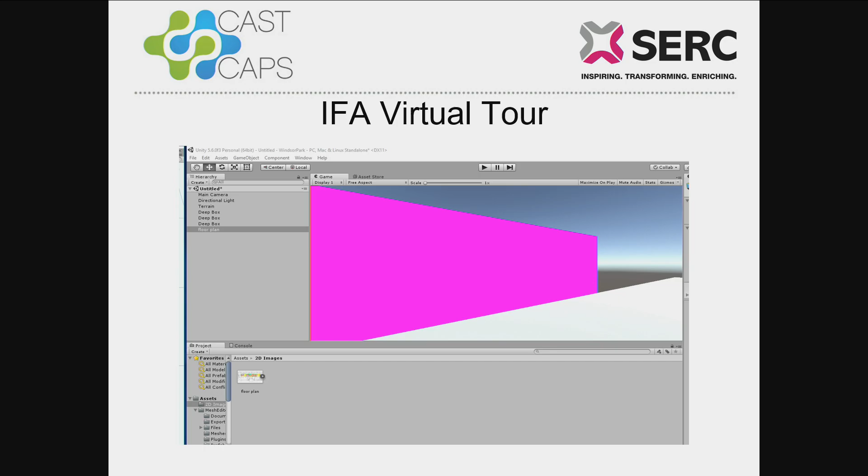This is the progress of it — still not fully completed, but we were beginning to bring in 3D objects and starting to manipulate the floor plans.

As you can see, this is the actual floor plan now turned into a 3D image. We've also added a camera, a character camera, which you'll see shortly, so you can see how the images and that floor plan would actually look in 3D for real life.

This is a room where you can go in and take a penalty shootout against the goalkeeper of Northern Ireland. We'll bring in an image on the other side of the wall and a 3D sphere, so you can pretend to kick a football against the goalkeeper and see if you could score.

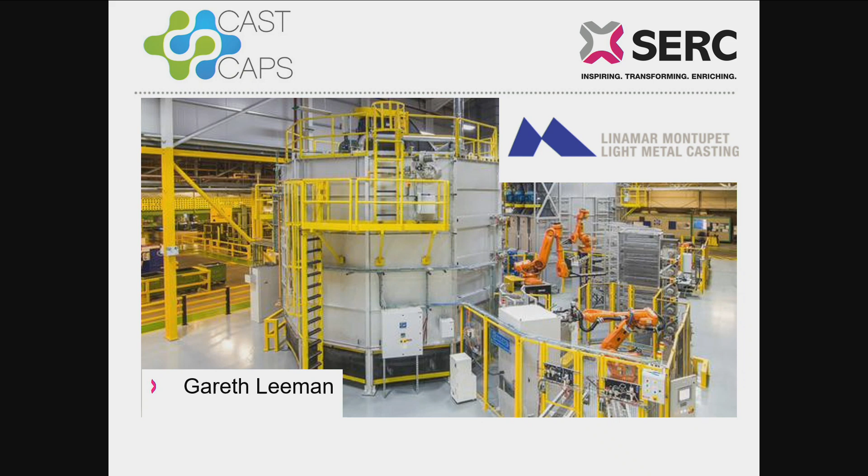As part of my higher level apprenticeship, I'm completing the foundation degree in mechatronic engineering. The final module in this was the work-based learning project. Naturally, with me working in industry, I did it in my own plant. My project was to reduce the scrap in the Montupet cylinder head due to broken oil legs.

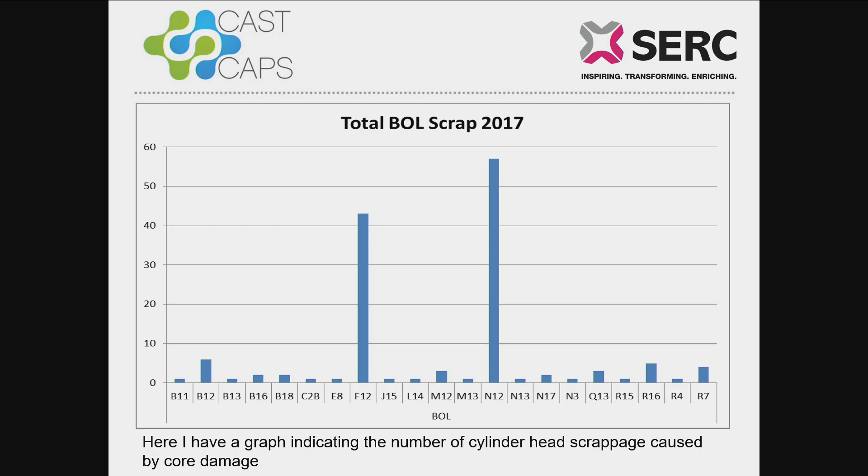This is a graph. Along the x-axis at the bottom you'll see many references. These references indicate scrap that's been caused by a certain part of the core. F12 and N12 are by far the worst. These are the two oil legs.

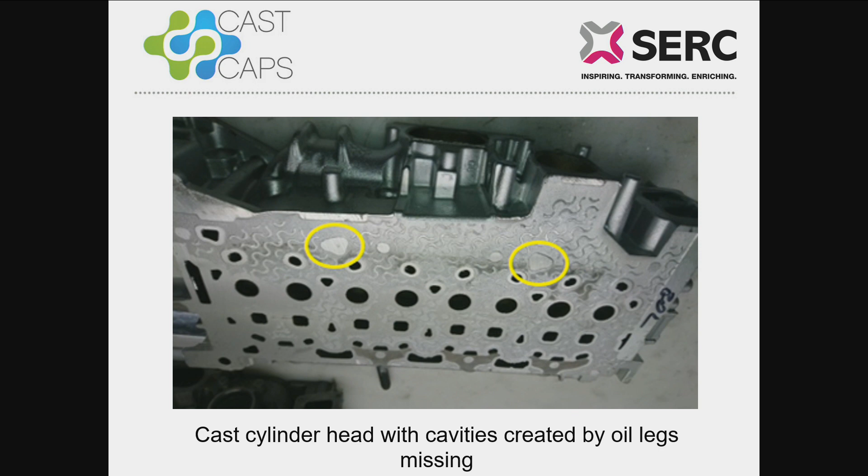This is the cast head. After the core is set into a die, molten aluminium is then poured into it to form the overall shape of the cylinder head. Within the two yellow circles here, you'll see a somewhat distorted triangle. This is not meant to be full. This is meant to be a cavity that is formed by the oil legs that keep breaking off.

The first process that I had to tackle was to be part of a problem-solving Kaizen. I really enjoyed this because as part of the business improvement technique module within the course, we learned the methodology and theory behind problem-solving techniques. I was then able to implement the Ishikawa diagram and the 5 whys technique in order to get to the cause of this.

When doing problem solving, within my experience, it's far more efficient to know the process in detail. So you can see in the left hand picture, within the two circles are the different parts of the core. The yellow arrow is pointing to the core conveyor. In the right hand picture, this is where the two parts, as you can see on the left, come together automatically to form the core pack.

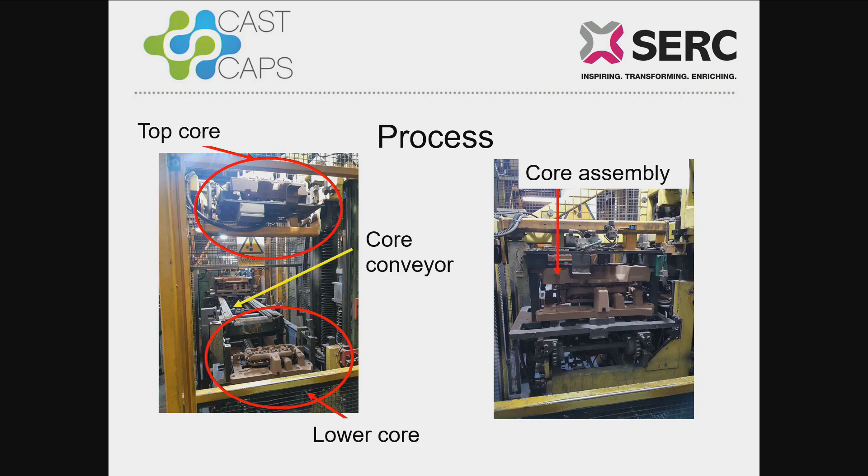The core will then move down the core conveyor until it reaches a certain position. A core loader will come across, lift the core pack out of the pallet and drop it into a broken core detection. It is here that the core is checked finally before setting into the die where the aluminium will be poured into.

By doing this, we were able to see the possible areas of breakage. The cores are made at a certain part of the factory and then brought round to the loading area, which you saw in the previous pictures. It could be broken transportation, it could be operator error when loading both sets of cores onto the core loader itself, and it could also be the transportation in the core conveyor.

During the problem solving, we came up with two possible solutions. The first one was to have the operator who is loading the cores manually check and mark that the oil legs are there. This is a good idea because the operator will have to verify and accept that the core is okay. But if it's getting broken further down the process on the core conveyor, it's going to do nothing to get rid of this problem.

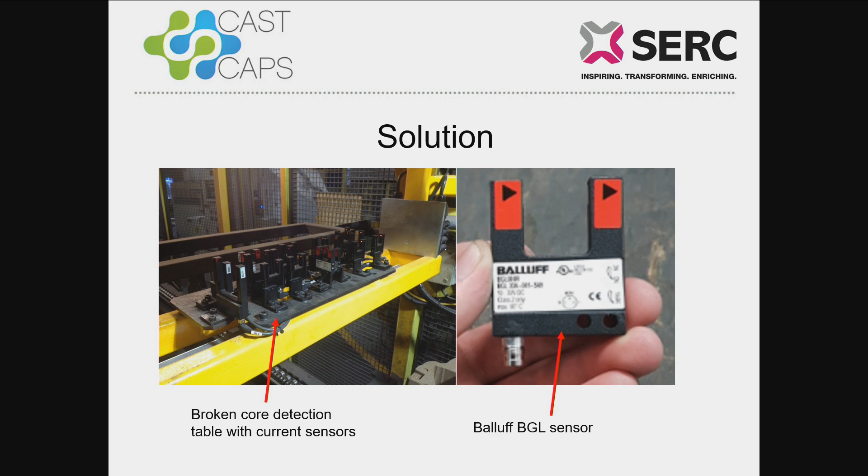So the second solution, and the one that we picked, was to add another broken core detection sensor to the table. The picture to the left is a broken core detection table. You'll see many sensors that look very similar but come in different sizes. These are, as you look at the picture to the right, the Balluff BGL sensor family.

This is known as a fork through-beam sensor, where you can see at the top of the sensor it is split. This is connected by a laser beam. Whenever it is broken by a part, or in this case part of the core, it will then be read as present.

So we do this for certain parts of the core which are prone to breakage. Whenever they are checked, finally just before entering the die, if any of them are missing, the core will get rejected. We can then recycle the sand so there's no wastage. It's very important that we catch it at this stage because the moment it enters the die, aluminium will get poured into it, and every scrap head costs us £19.98, and it doesn't take long for that to start adding up to cause a problem.

So I knew the sensor that was recommended for me to use. It's just easier for fault finding to use the same type of sensor. We're very familiar with it, and we'll keep it in the factory and the stores. And I knew the plan. As a maintenance technician, it was then my job to follow this on through.

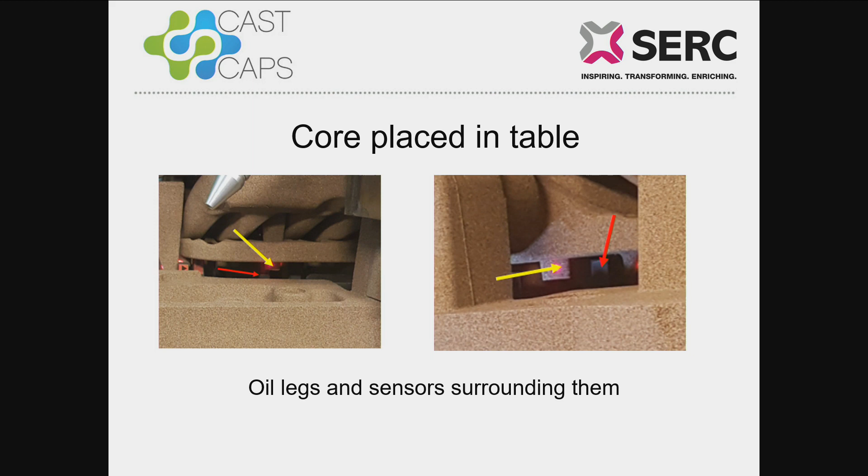At this point it became very obvious: I can't use this sensor. Nothing else can go underneath to detect these. So I then had to go back to the sensor research.

If I put this on, it'd be reading a different part of the core as well as the oil leg. So even if the oil leg wasn't there, there's a great possibility the core will still get passed.

There is a window function, which was perfect for this type of part of the core. You had a near and far tolerance you put in. I put these in at around 3 mil, plus or minus. This meant that because there are parts of the core very close to this, but they're out of those tolerances, if the oil leg wasn't there, it couldn't be seen.

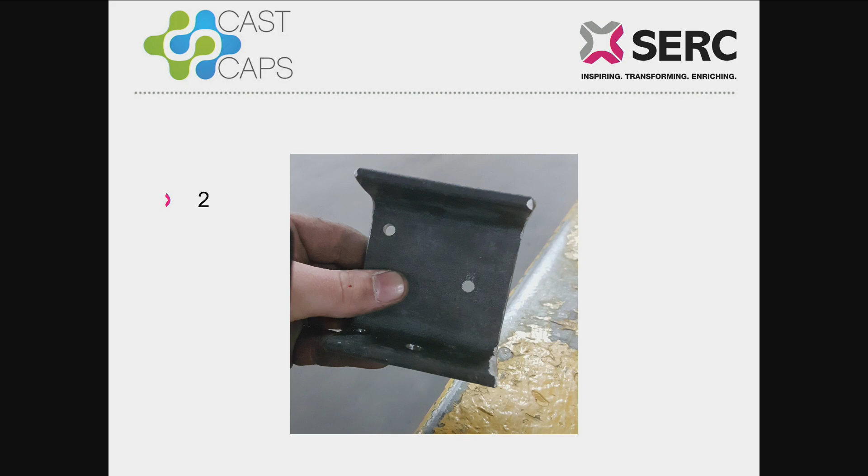At that stage it was just simply making brackets. I did this quick and easy because that wasn't hard. I used 40 by 40 angle iron, and then channel. The reason I didn't use angle for both was that channel would be for the right hand sensor. Operators come in to clean the machine here, and I wanted to try and avoid it getting knocked, because that is a possibility.

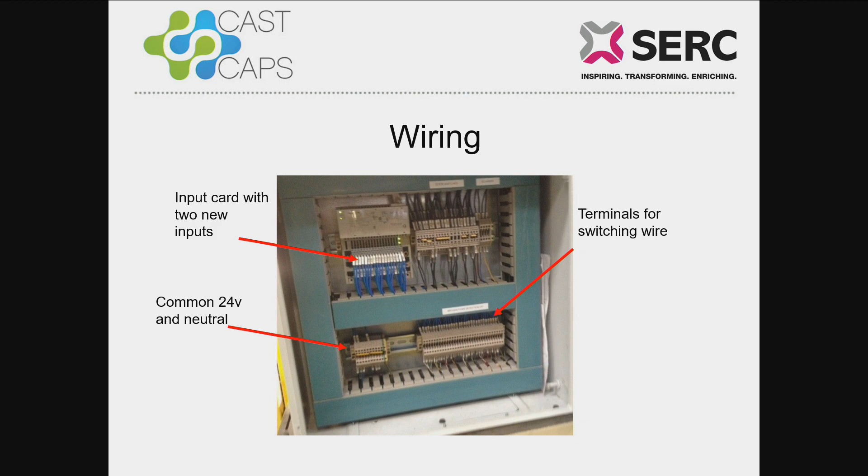After this then came the wiring. I needed 2 more 3-pin proxy cables. In order to do this, the brackets were on, so I knew where they had to go. I ran the cable in through flexible conduit and cable tied them to the parts in an area that wouldn't affect the machine before it ran.

I then wired the common 24 neutral to the commons. The switching wire, which is the one sending the signal, I put into the terminal rail for the switching wires, and then up into the input at the top left corner here.

The next step then was to power the sensors at the machine and then mount them. If I mounted the sensors onto the bracket before having power, I wouldn't be able to see the laser. With the little room that I had, it was very important that I had power so I could then spot the part of the bracket I was going to drill and tap.

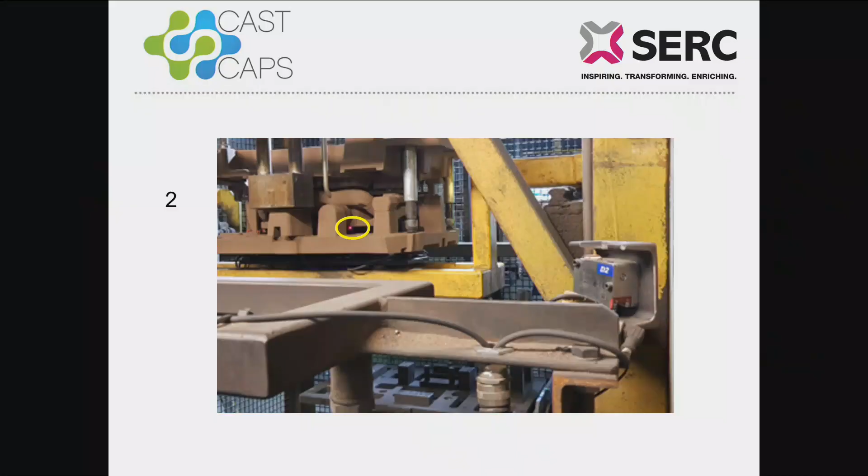Overall, the project was a success. After 6 months, the scrap in a 6 month period went from being 70 down to 8.

I was annoyed about the 8 because it happened from something I was trying to avoid. It was an operator who went in and knocked it. Well, I don't know exactly what happened, but that was the most likely thing—an operator knocked it. And then it was sort of back to me: right, well, how can we solve this?